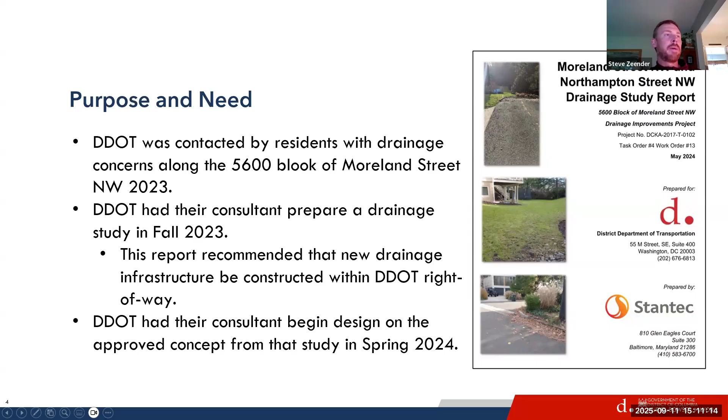Anything, Dave or Susan, that you'd like to add to that? We should do a high level overview of drainage design for everyone, because I think there were some questions about things that we take for granted as designers.

So the inlets - if you think about the storm drain system, rain falls on the surface, and because you have impervious surfaces like roadways or roofs, it can't infiltrate into the ground anymore, which generates runoff. That runoff is getting to Northampton. So as designers, we look at the drainage areas, we look at the engineering manual and design guidelines for DDOT, and then we design the inlets to those standards to pick up the runoff being generated, picking up 100% of runoff before it crosses that intersection.

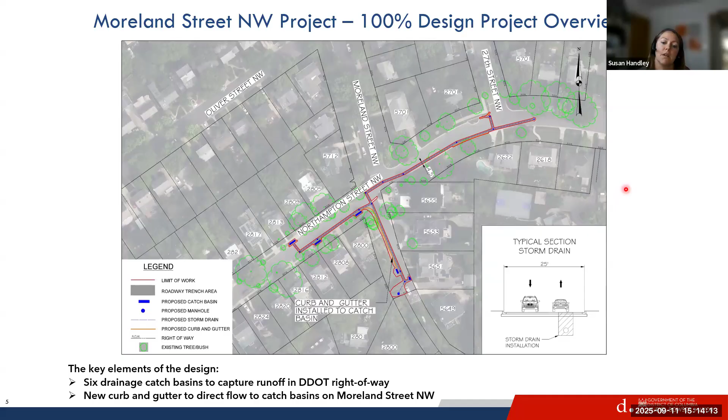Okay, I'll go to the next slide. So we've planned for the project to be constructed in phases, working from the lower point on the east end and then working our way up. We do anticipate for the majority of the project to be able to keep the road open, at least half of the road open, and use a flagging operation to control traffic back and forth.

We've made some initial assumptions on what the durations and phasing look like. When the contractors begin their work, they're also requested by DDOT to submit a schedule. But DDOT normally establishes an overall anticipated duration for the project that they want the contractor to perform within, so we do have some control over the overall time it would take to build this.

I think there might have been a question about work hours. The standard work hours are 7 a.m. to 7 p.m., not including weekends or holidays. The contractor would have to request approval from DDOT to work outside those times. Monday through Friday, 7 a.m. to 7 p.m. would be the typical time frame, though I doubt they'd work till 7 p.m. - more likely 7 a.m. to 3 p.m.

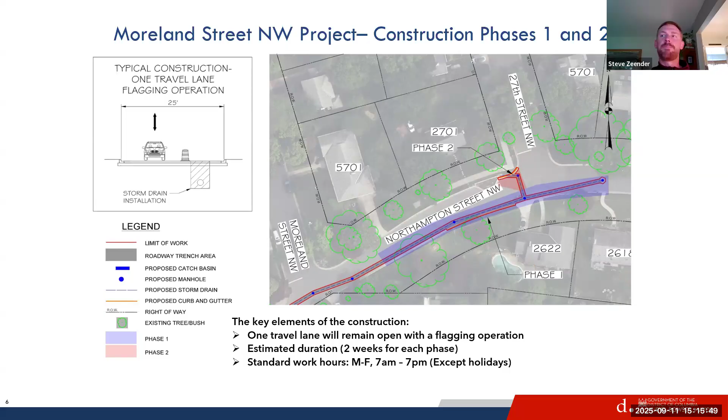Hey Steve, can I interrupt on that point? Typically, especially during winter months when it gets dark at 5 o'clock, you're probably not going to be working until 7 o'clock, right? That's right. And the contractor doesn't want to be working when people are coming home from work and there's a lot of traffic, so they'll try to get in and get out on a daily basis.

Going into the project phases, for most of it we anticipate being able to work along Northampton with flagging. However, this portion in the middle of the intersection, we feel will need to be closed while they're building these trenches, with a short-term detour around the area. But we think this work should be relatively brief in the overall scope of the project. This is phase 3B, Dave, and we haven't put an exact time to it, but we're probably talking a week, maybe two weeks.

Steve, we want to reiterate that the closure is only going to be during daytime work hours. During non-working hours, that closure will be plated - steel plates placed on the ground - and it will be fully open to vehicular traffic. The contractor would make it safe before the end of the day.

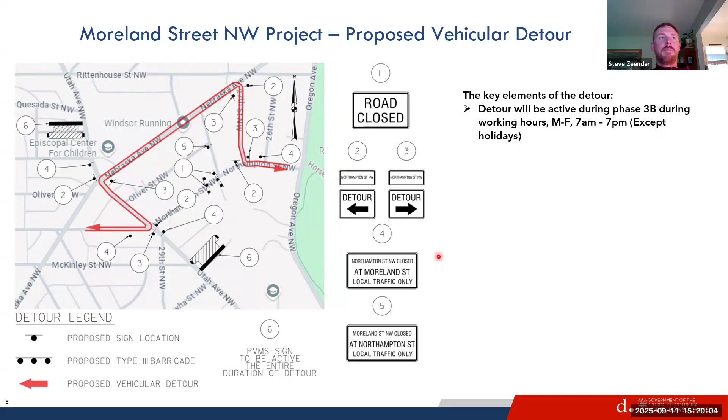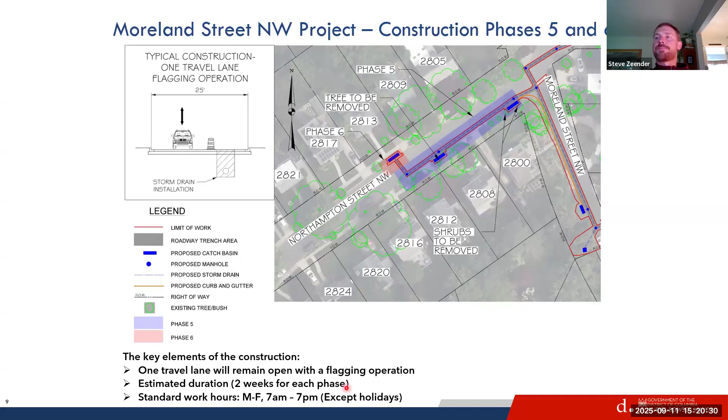So let's see, we're pretty much here, I guess, between 90%, really at 100%.

I'm not sure, are there any updates on the construction timeframe, Morvard? Is fall 2026 accurate? Yes, I am going to add this project to the next IDIQ construction. We are closing out our current existing IDIQ contract, so I put this for the next year.

Okay, so I want to be clear about that for everybody on the call, because I've been reporting based on the prior information that it might start as soon as this fall. This is actually moving it a full year, just to be clear here, right? It just happened, yeah, it just happened like last week as we are wrapping up our final task orders for construction. It's new news.

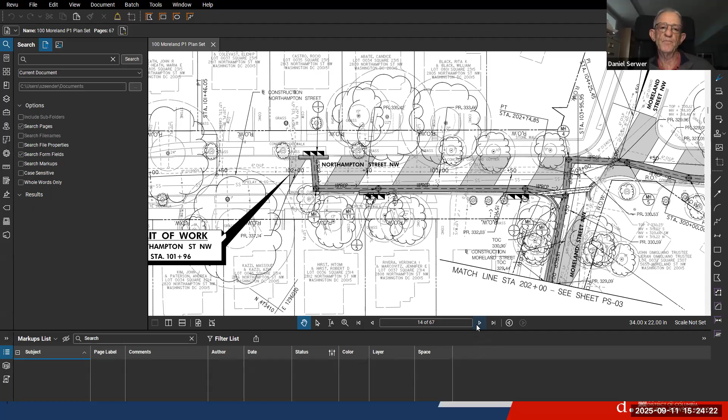Can you please zoom in, Steve? So if we do the construction, the pipe is right in the road, right? Is it in the parking lane or in the road, the travel lane? It's in the roadway, and then behind that is the sidewalk, right? And then behind the sidewalk is the front yard. We're not going to anyone's front yard for sure.

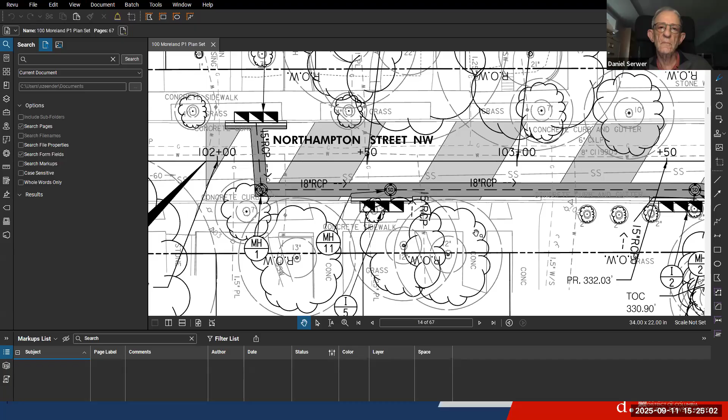The construction is very far. We are not disturbing anyone's front yard. We may have some maintenance of traffic for pedestrians, like we may close the sidewalk during construction, which I don't have any information on right now. We may detour the pedestrians somehow, but we don't use people's front yards for storing materials or disturbing it in any way.

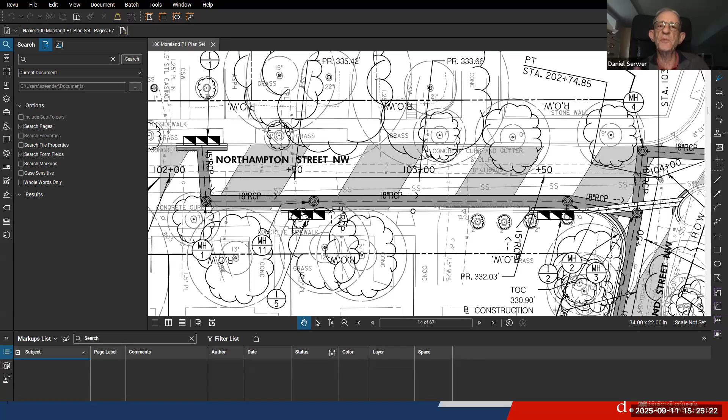Do you use the verge or the sidewalk, the verge being the green space between the sidewalk and the roadway? Unless there's an inlet placed there, no, we're not gonna do that. If anything happens, there are trees, we're not gonna touch any green spaces. If during construction something happened, we're also required to refresh the grass area, but based on the plans I see, everything is in the roadway. If we need to excavate nearby, we're not going to disturb anything in the front yard or even the grass area, or if we do, we put it back to the existing condition.

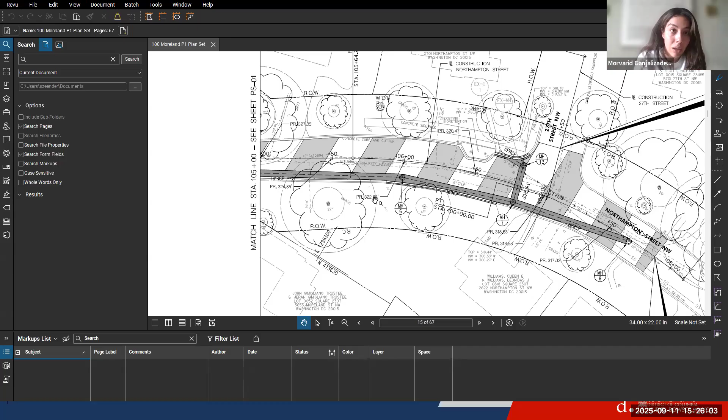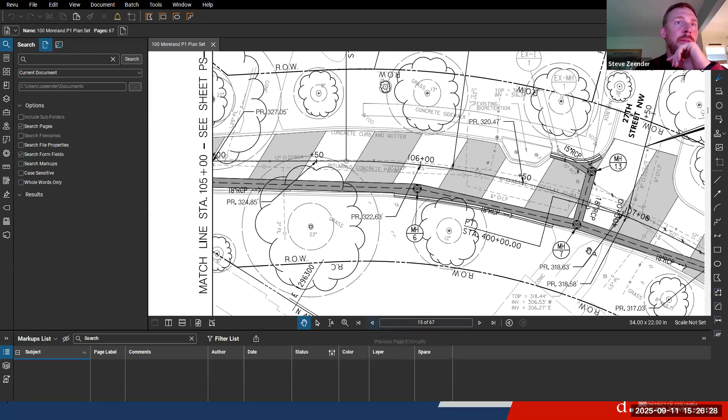I have one other question. Can I just elaborate on that? I just want to clarify. There are some places where our pipe trench gets close to the edge of road, so we would be rebuilding the curb and gutter in this location, and there's going to be a little bit of disturbance along the grass to rebuild that. Then to excavate for some of these inlets, there's also going to be some disturbance and removal of a few shrubs that are in the right of way. The right of way line is, you can see, back here.

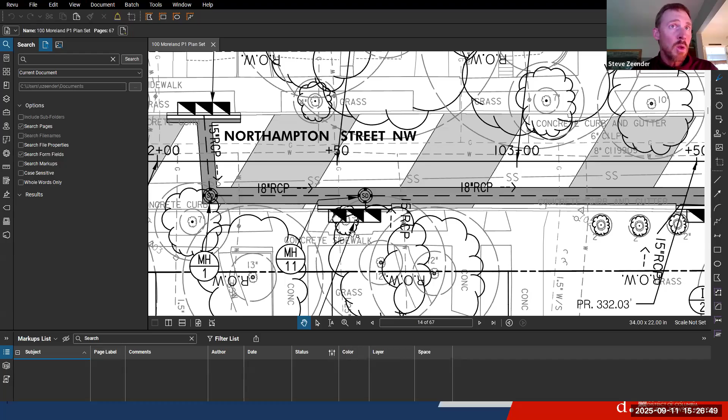I know from the standpoint of this invisible line, the concrete sidewalk and the grass all feel like part of the lawn in the front yard. We'll certainly try to minimize disruption to the verge, the grass buffer between the sidewalk and the curb. I looked it up online and that's the most commonly used term.

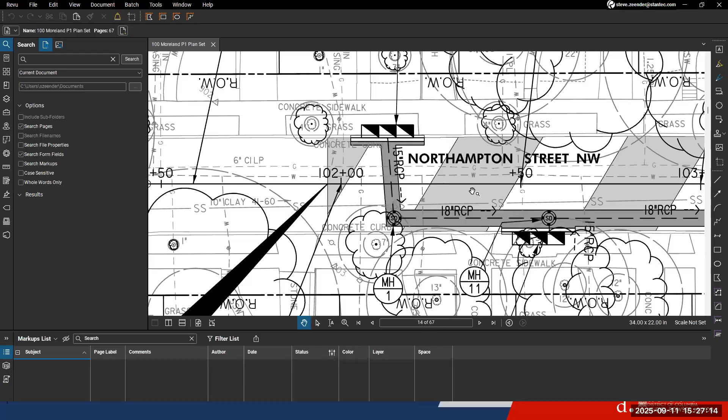Thanks for sharing that. Steve, can you open the LOD? That is the area of disturbance. We don't have any tree removal, right, Steve?

There's some shrub impact, and one tree gets impacted for the inlet removal, but that's just for this, not for excavation. You're going to remove it to have the catch basin, right? Correct. But all equipment and material will be stored in the roadway.

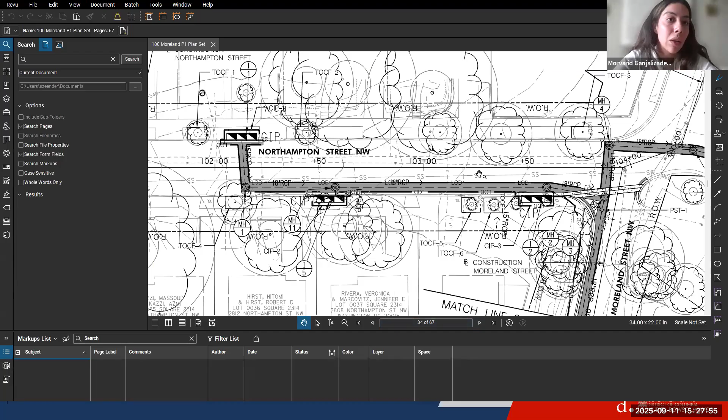In the road, normally that's how we do it. Case by case it's different, but nothing will come to the front yard. It would be in the roadway or parking lane where cars are parked. So this is our area of disturbance, this line here. LOD stands for limit of disturbance, what the contractor is held to during construction.

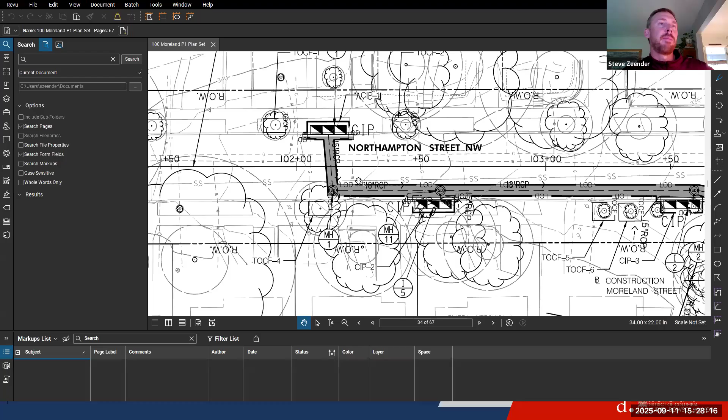So there's really no reason for them to go beyond that other than to put these inlets in. They're going to have tree protection fencing around the trees that don't get impacted. And where they have curb and gutter that has to be replaced, there will be a little excavation behind the curb and gutter to install that.

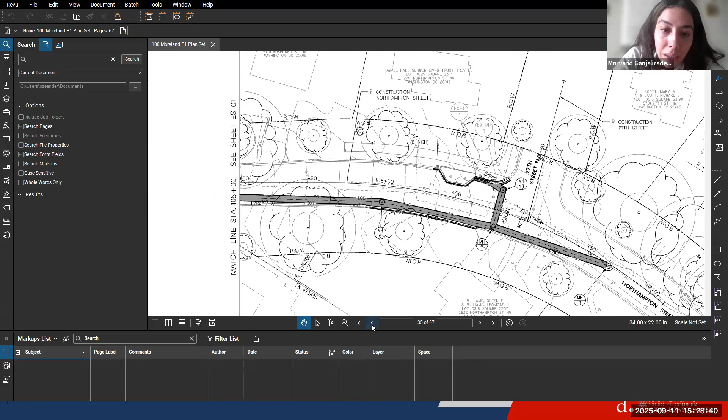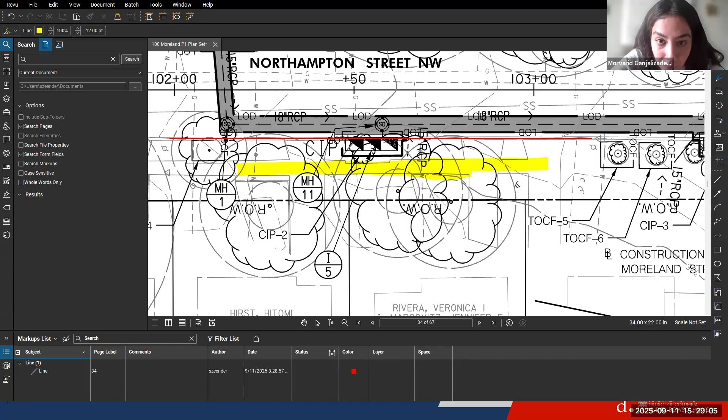Can you also go back to the previous page and show where exactly their front yard is and how far we are? If you zoom in, can you point out the front yard of the house and then where the limit of disturbance is so we understand? In this case, the curb and gutter is right here, and the sidewalk is here. This is the right of way line. So there's a little grass up here, but the limit of disturbance is well within it.

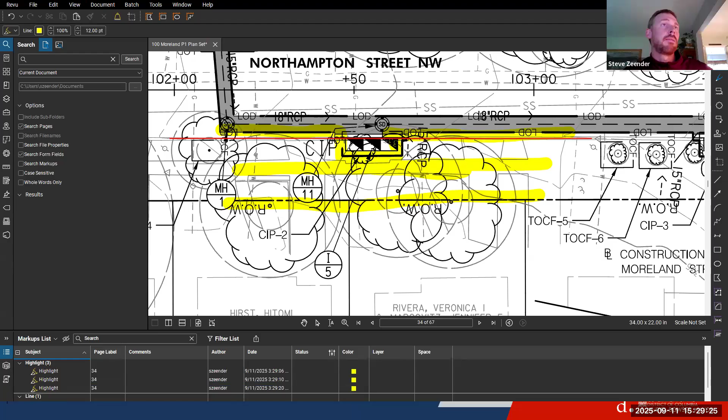You're going to disturb the verge in order to install the grates, the inlets. Correct. It'll be restored once the inlet's installed, it'll be restored with grass.

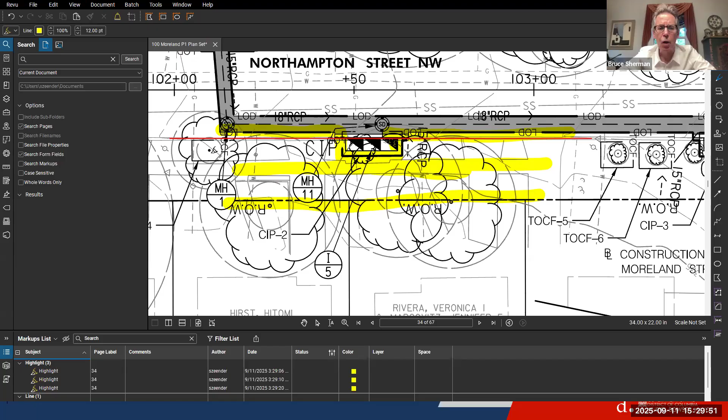Hey, Steve, it's Bruce. Just a quick question. Carolyn Copper, who lives at the corner of Moreland and Northampton, and her next door neighbor Jen Marcovitz, they're on the call, and they had questions once upon a time. Carolyn and Jen, I don't mean to speak for either of you, but I want to clarify here, removal of shrubs or trees to put the inlets in is something we can just reiterate.

Steve, if you zoom out slightly with the plan, where Moreland is, which presumably is on the right of the screen as I'm looking at it, right? Correct. Okay, so right at the corner is Carolyn's house. Carolyn, if you want to jump in and ask any question about this, and Jen, if you do too, I know these questions have come up before. It's a great opportunity now to clarify exactly what's going to happen here.

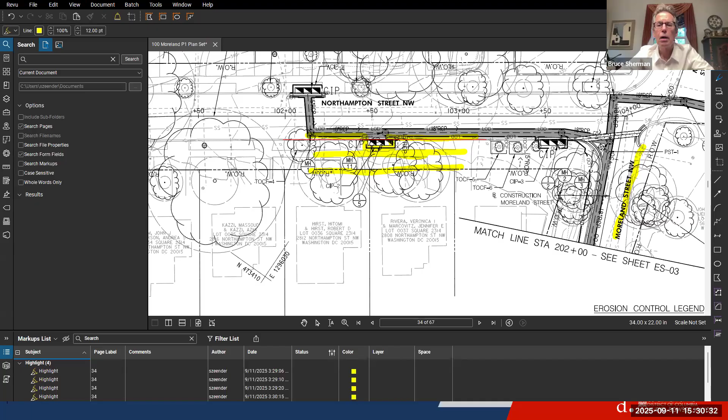Steve, maybe you can just describe it, because with a lot of the design or the lines on the plan, it's sometimes hard to see exactly what the removal of a shrub or a tree is going to be. Just point out where the drainage inlet is, I guess, right?

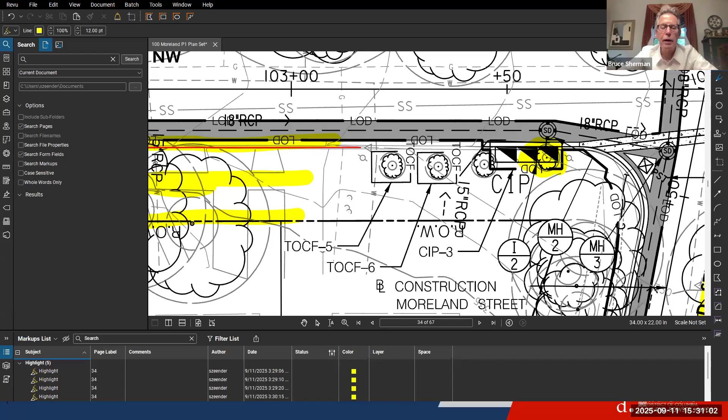So I think there's a crepe myrtle right here that's in conflict with this inlet, and that one to the left, that's going to have to be removed too, those two. And then there's one actual tree to the left, I think that's at I-5. There's this tree and it's small, I think it's like 2 or 3 inches in diameter.

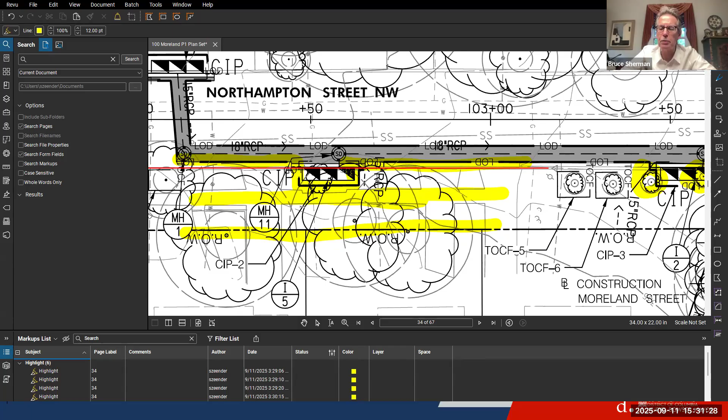Now, when you put the inlets in and you've taken the trees out, does DDOT, and this is a contractor DDOT question as opposed to a Stantec question, come in and replant? Or does urban forestry come in and replant, or what happens? I don't think we're proposing a new tree. In this case, there's just nowhere to put one because of other utility conflicts or underground utilities.

I suppose I can help a little bit.

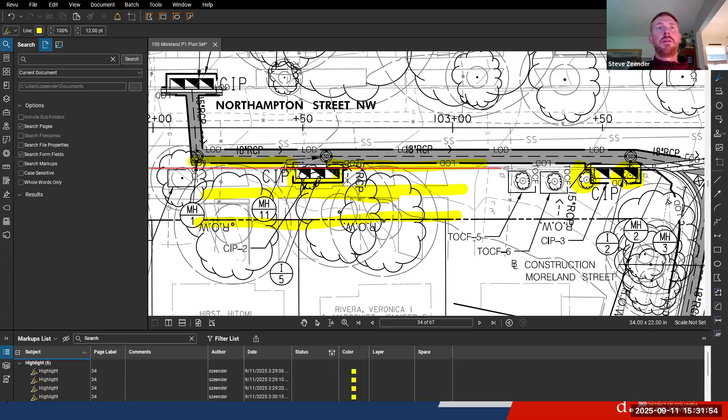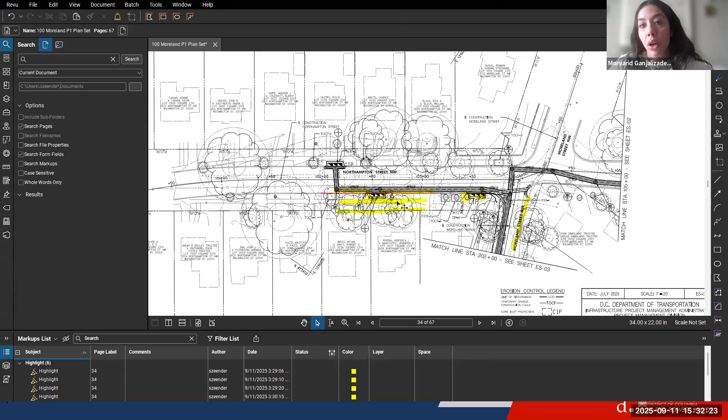Normally UFD reviews all of our plans, and we are not allowed to remove any trees unless we get approval from them. Then they decide based on the plans if we need to replant a new tree or if it's feasible. For other projects, if it's a mature tree, we try to avoid impacting any trees as much as possible.

This is a small tree, it's a small shrub. I don't know what the reasoning was behind it. I wasn't involved, I don't know, Rashid knows, but they normally approve and decide whether replanting is needed or not.

I assume this is all shrubs or small trees, so that could be a reason, or the underground utilities. We can dig and see what the reason was.

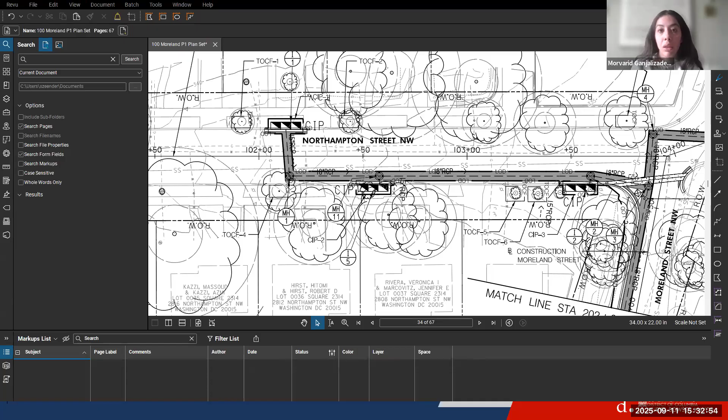Okay, all right. Again, not to put either Jen or Carolyn on the spot here, but Bruce, both of you - yeah, go ahead. I just couldn't figure out how to raise my hand. Apologies that I'm on a phone, but thanks very much for asking.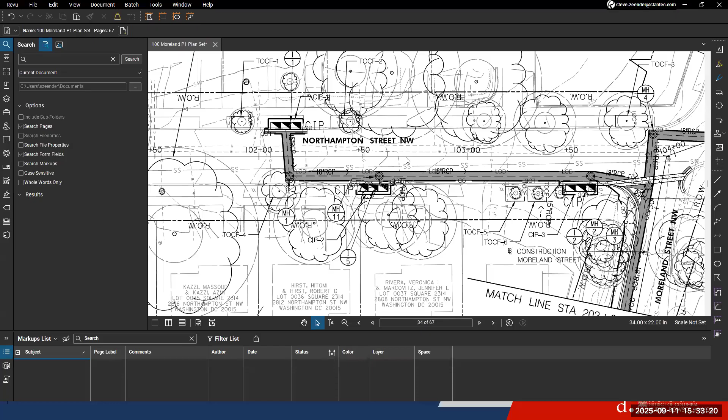I'm happy to defer to Carolyn or others who have questions. I just wanted to confirm which tree was being referred to in front of 2808 Northampton. It's a little difficult for me to see the slides since I'm on my phone. I think you're referring to the small tree in the inlet between the sidewalk and the street, in which case I believe the city planted that tree. I just wanted to confirm that's the case, if someone could let me know without pointing to the slide.

Thank you. Yes, that's the tree being removed, the one between the sidewalk and the street. Thanks, no other questions from me. So is this a current enough Google picture to capture that tree?

I don't think so, I think this is 2019. I think the tree is... okay, so it's an older image. Anyway, it's on the easement, right on the side. It's a tree, okay, all right.

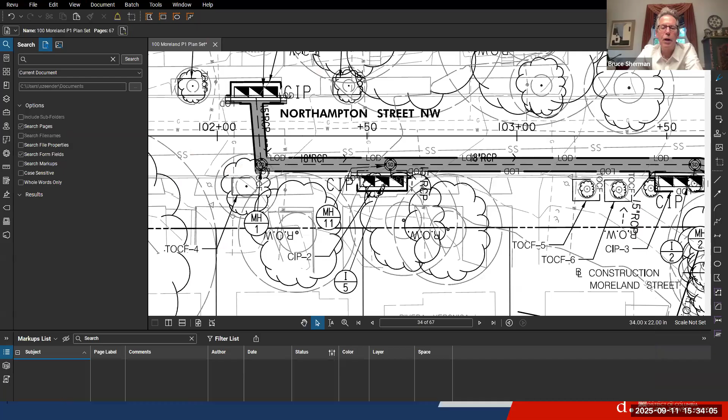Well Jen, obviously you know which tree it is. No, that answers my question, thanks. Okay, fantastic. I did have one other question, if you don't mind.

This is a pretty expensive project. Do you know how much it's going to cost? Oh, let's see, give me a second. It's around 1 million, I think. How much? Yeah, it's 1 million, 1.2.

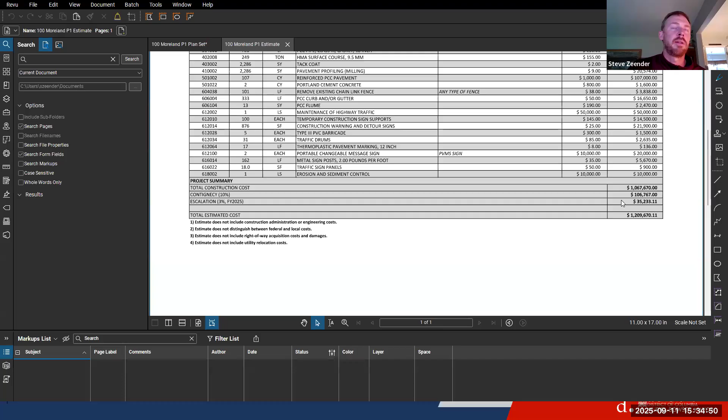The question I have is whether you considered any cheaper alternatives. Well, there's unfortunately not a lot of alternatives to begin with.

We did look at this area. There have been some things done previously, on a small scale, some small stormwater BMPs that were put in on the property at the end of the street, but they really aren't sized or capable of handling the amount of runoff that comes down in the larger storms.

Really the only alternative to stay within DDOT's right of way is pretty much what you're seeing, to intercept that runoff and take it back and tie it into the nearest storm drain system. There's just unfortunately not an existing storm drain system in the vicinity, so we're having to build several hundred feet of new pipe and inlets to bring this street up to DDOT standard, which is to handle the 15-year storm.

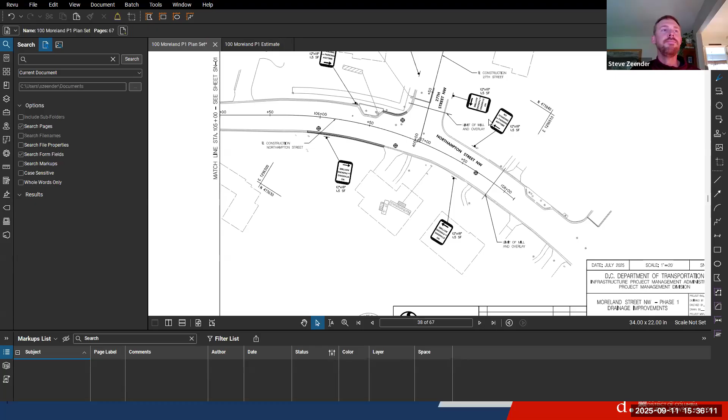So does that answer your question? I think it does - you didn't consider cheaper alternatives. I can cite a few of them, but I don't want to get into a quarrel during the meeting. There are other options.

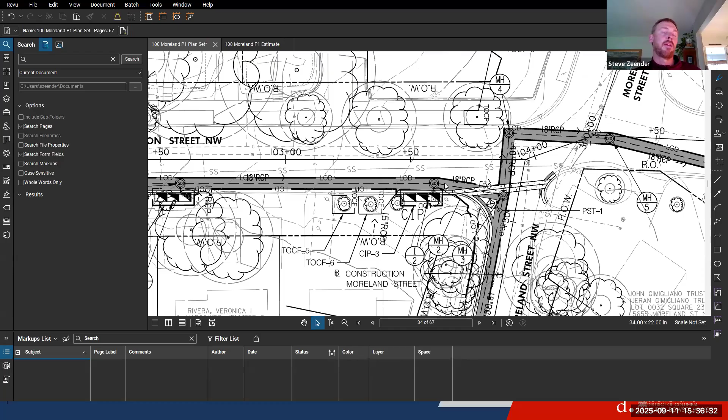There were improvements in the past to this gutter, to try to at least prevent some of the runoff. So that has been tried and could be considered. The real issue is that a lot of the runoff is coming from private property, some of it's coming from DDOT's right of way, and I'm trying to get back to a drainage area map to show what I mean.

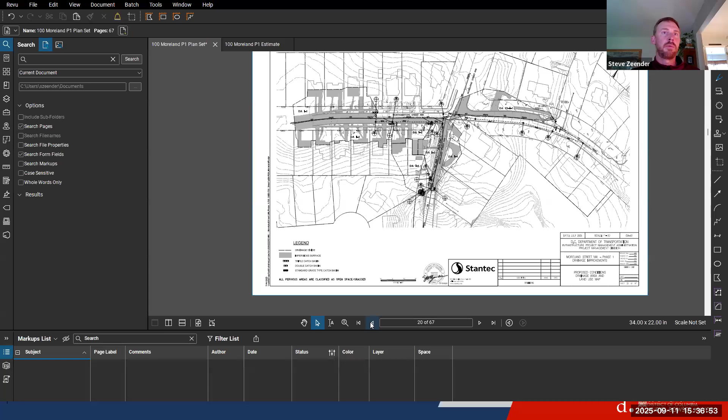I guess this is... yeah, while you look it up, I mean, really, this should have probably been built in the past, is the issue.

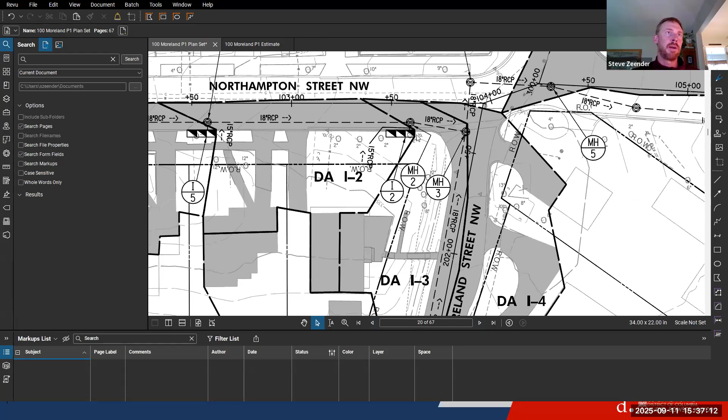So maybe you can see, to do this kind of gutter up here intercepts some of the runoff on Northampton, but there's a lot of runoff coming from these properties back here, just overland, that we're trying to intercept. Even with this project, we're not necessarily going to intercept all the runoff from private property, but we're going to intercept what comes into DDOT's right of way, whether it started in private property and then comes into DDOT's right of way, or runoff that was already in DDOT's right of way that wasn't being captured. So we're going to capture all that.

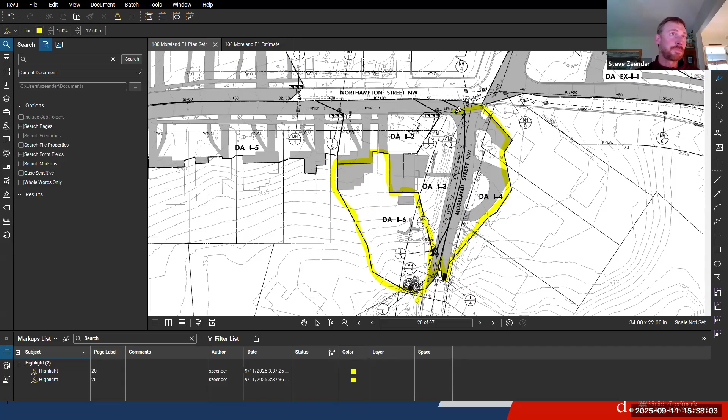I'm going to just try to highlight those areas so you can get a feel for it. All this now isn't really controlled, and just runs down into the backyards down here. So we're going to put in a couple different inlets.

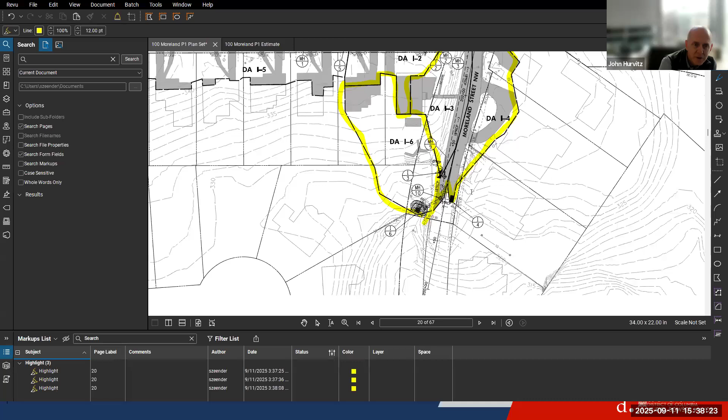Yep, all right, this is John Hurvitz. The other thing, you alluded to this, but just to point out, to the left of where you have the yellow, if you look at all those houses on the south, this isn't being addressed in any meaningful way. The gray is what's going into the street, the white is what's going behind the houses. So most of these houses on the south side of Northampton Street, the water they're collecting on their property is going into the backyard, which then makes its way into the houses down here on Moreland Street. That's what you guys explained to me earlier as well.

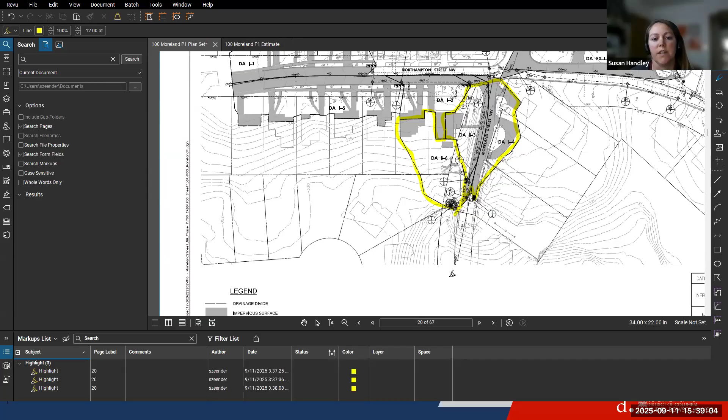Yep, so like Steve was saying, this will pick up the drainage, whether it's generated in the DDOT right of way or goes from private to DDOT and back. It's going to pick up that portion, which is about half of the flow that is actually getting to those yards. So this is only picking up the public, the DDOT right of way runoff.

Right, no, I'm not complaining about it, it's better than nothing. But my point is that, to the extent someone says, well, it's not my problem, why should I worry about it - well, all these houses on the street, their water, not that they're doing it because they're bad people or anything, but the water flow across the street is all coming from these houses to the left of that yellow line. If you could highlight that - the water flow is all coming down into the properties here too. So it's a problem of the commons.

You're making my argument for me. Well, I'm not - this project is only capturing 50% of the water coming away. We paid, and all these houses on Moreland Street, when they were constructed, we were required to manage our own stormwater. So we all have basins in our yards designed to manage our water. We're not required, and it's impossible for us to manage the water from the neighborhood. And yet that's what we're forced to manage, because the water flows in.

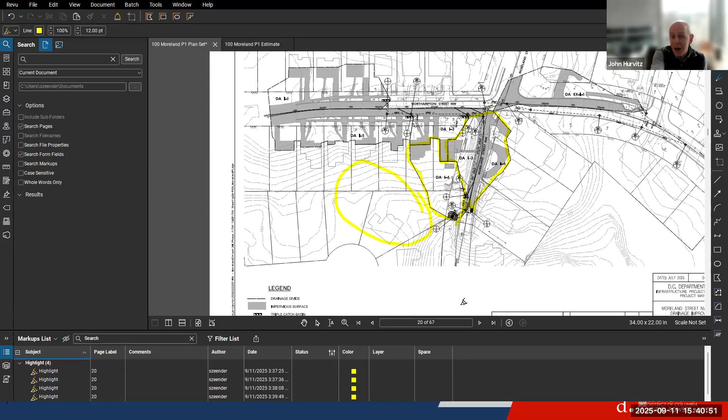When there's a storm, even a mild storm, I have 6 inches or more of standing water flowing through my yard. It goes over the retaining wall we have and onto Moreland Street. And the house behind us has it flowing through their whole basement and their entire house. There's nothing any of us can do about it because it's just unstoppable. So this project is collecting 50% of it so there's a hope of managing what's retained.

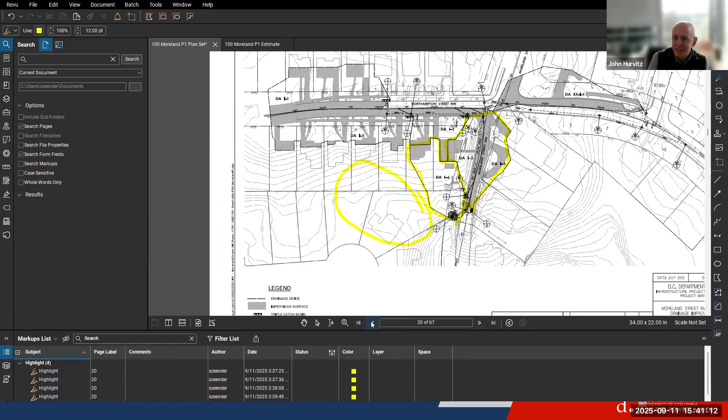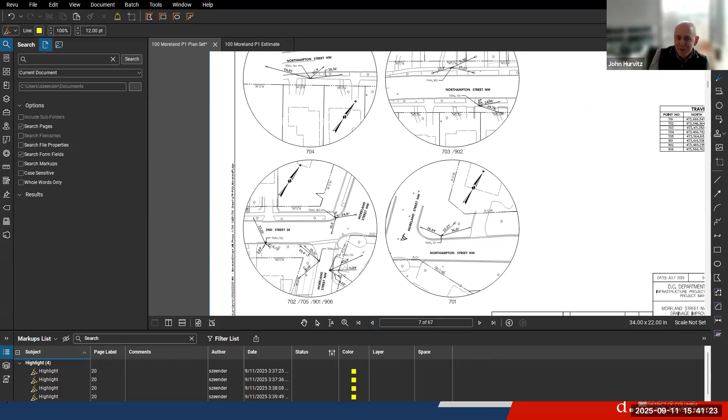But ideally, everyone on the street would divert their water to the front of the houses, which I think they're not even allowed to do by DC laws, as I understood. But this is not an inconvenience, this is a huge problem. The bottom of my house fills up with 6 inches of water, there's nothing I can do about that. And it doesn't even require a 15-year storm - it happens once, twice, sometimes 3 times a month.

And it's not just me, it's all the houses along our street and then all the houses along Moreland Place behind us, because the water, when it overwhelms our houses, it then floods everyone else's houses down the hill. And as the person on the phone said - I'm sorry, I can't remember your name - this should have been done, the street improvements are only to bring this up to code, and it all should have been done years ago. It's just never been attended to, and now it needs to be fixed, should have been done by the developer.

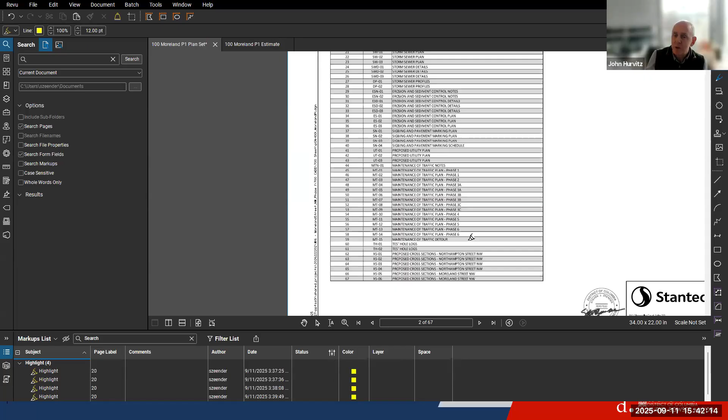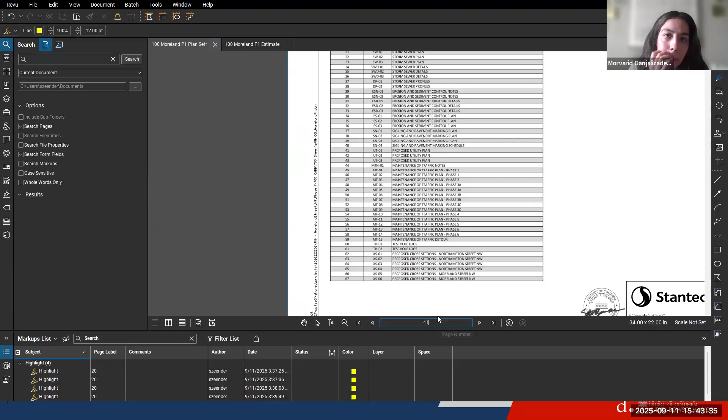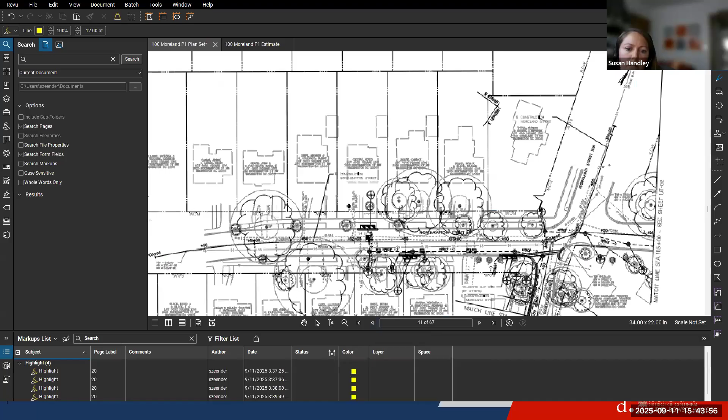Steve, do we have any? We're trying to finalize - the last time we spoke, we didn't anticipate having to relocate a lateral, but based on some DC Water comments, we do have one lateral that has to be adjusted. We also have the gas relocation. These plans are not the latest, but we had to make an adjustment to the location of this manhole and this connecting pipe, which is going to impact the lateral to 2808. So that water lateral will need to be relocated.

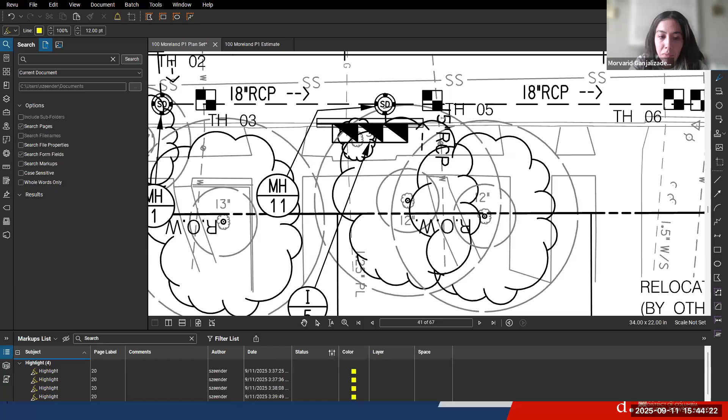Gas, 1 or 2 days for work - it would just take a day or two probably to do that work. What is a lateral? The lateral connects to 2808. It goes from the main water pipe, the 8-inch, to the house.

So during that time, that family won't have access to water? I don't know what the specific outage would be, but I would imagine it's a very short process - it's a DC Water relocation, right Steve? Correct. It depends, I think sometimes our contractors do it and DC Water pays us in most cases. So our contractors do it, it's a very quick process. It's not like a whole day or a couple days, it's gonna be a couple hours process. They normally do a lot of coordination in person with the residents to make sure they know, and it's not a very long process. I don't know if any of these streets have a lead pipe or anything like that with DC Water - it's not a very complicated case. It happens during construction, it's very quick.

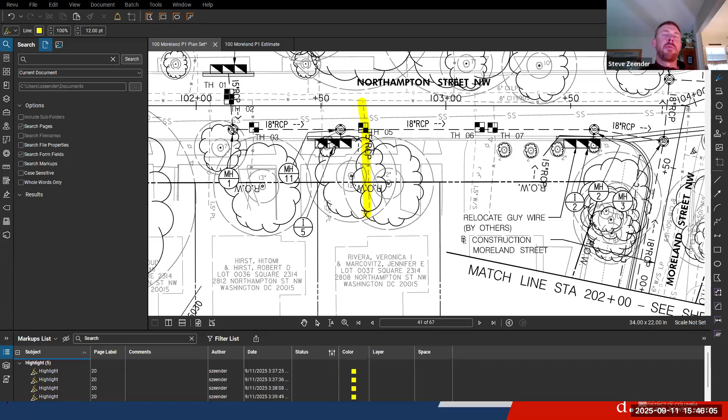Yeah, I'm gonna guess they would trench and install the new lateral, and then switch it over once it's ready to go. So the outage would just be the period of time when that switchover happens. But they do this type of work all the time, it should be pretty straightforward.

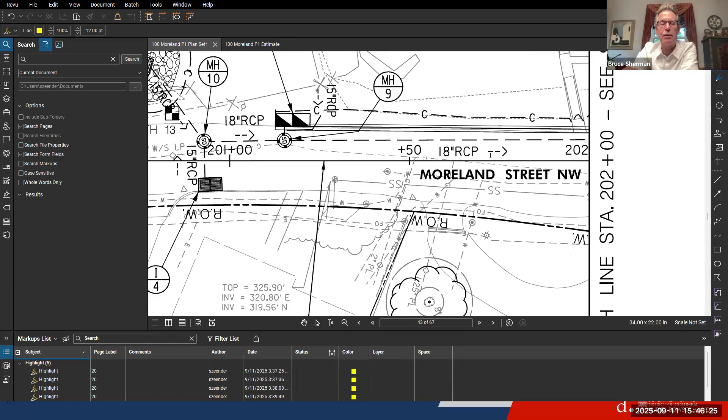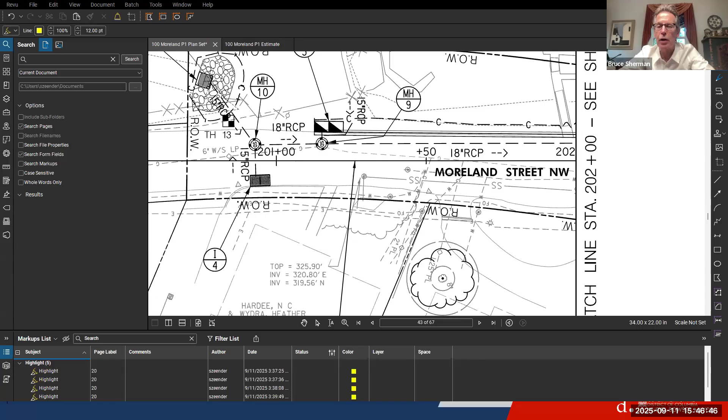One thing, can we do this though - can we get the actual schedule or details on this to answer this question for anyone else who has this concern in mind? I know we're talking about it right now and answering it, but it might be good to come back and say, these are the properties affected by the relocations and about how long it's going to take. And since construction is not going to take place until 2026, a year from now, these relocations are not going to happen until shortly before construction begins - is that correct?

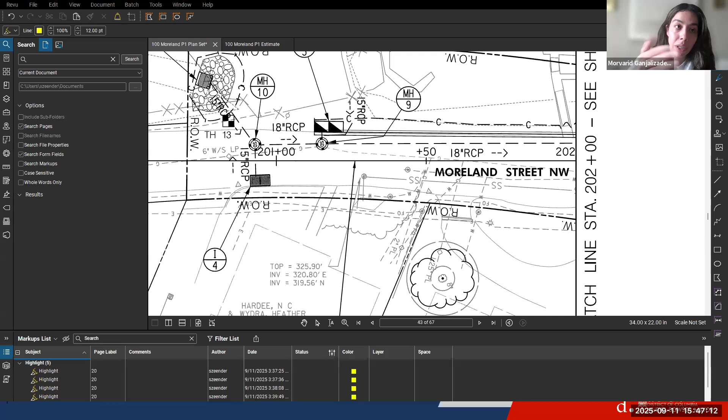I can't speak to the exact schedule. This is during construction. Normally when we start construction, relocation happens - it's the same for all our projects. It's during we start and then we do it. There are some cases, probably for Washington Gas, that could be different - they do their relocation a week or two weeks before we go ahead. But we're talking about 2026 in any case, yes.

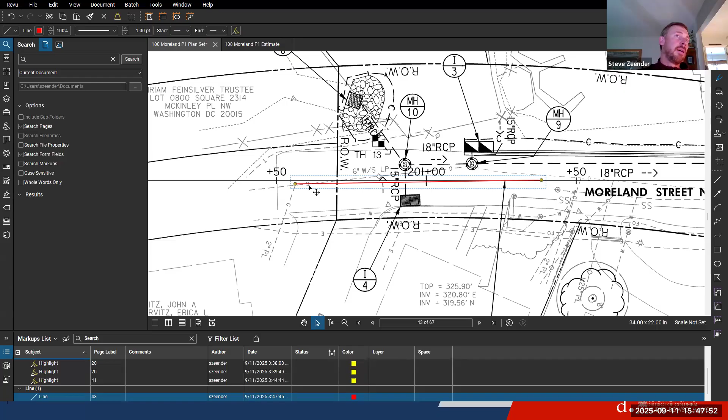And the gas lateral gets relocated here. This is on the south end of Moreland Street. It's in conflict with the storm drain manhole. It has kind of a weird circuitous route, so we're going to straighten that out, and that would also happen. I think it's a 6-inch line. So that would happen around the same time.

Okay, just going down the list of questions, and Carolyn, if we didn't answer that sufficiently, let us know. But to Rita's question, how will trash be collected during the time period the road is completely closed? And will lawn companies and deliveries be able to use the roads? Is this a road closure for Moreland? For Northampton too, presumably - Rita lives on Northampton. During the presentation, someone said there was a section of road that will be closed completely for a short period of time, maybe a week or two.

For trash, I can speak to that - our contractors during construction will take care of it. When we come and notify you about the construction, there is guidance on how we collect trash. Case by case is different, but normally when we leave fact sheets, we guide you on how we're going to collect the trash. You can put it outside, they come grab it and then put it back. It's our responsibility to do it.

In terms of deliveries, that's something that needs more coordination during construction. Per my personal experience, normally if it's closed, we still maintain a walking path, so they park the car and then walk and do the deliveries. It's going to be an inconvenience, I understand, but for trash, I'm pretty sure we are responsible for it - our contractors will do it.

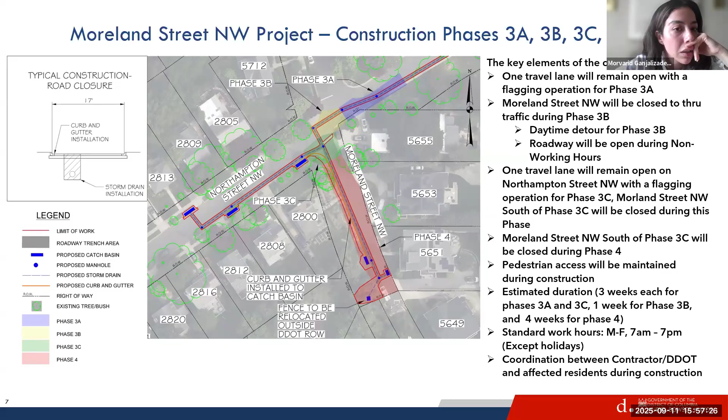Will we have access to our driveways? I know we've talked about not being able to park on the street, but will we be able to get into our driveways during this time? Your driveway is in the front - yes. Well, the ones that are impacted, there's no parking, and I need to see where the driveways are. Steve, can you show me them? We wouldn't actively block egress and ingress to homes, right? I don't think that's a standard we follow.

Unless construction is directly in front of your driveway for trenching the pipe, that's why I wanted more clarity - access to a driveway will be maintained. There may be some coordination with the contractor in terms of if your driveway's in the flagging area, when you can leave, but your driveway will not be closed. The only time we have a driveway closed is in the alley - sometimes homes in the back have a driveway in the alley, and the alley is closed. Like if we close the Moreland, and your driveway is in the Moreland, we can't do anything about it.

But if it's in Northampton, I think it should be fine. And Candace, your house is clear of the trenching. They're not going to be trenching on that end of Northampton.

Oh, okay, thank you. Actually, kind of a follow-up to what I was going to ask also. I'm just not familiar with a lot of these terms, and I'm not used to looking at drawings like this. Do you have any kind of an actual visualization when all is said and done? What will we see? What will it look like?

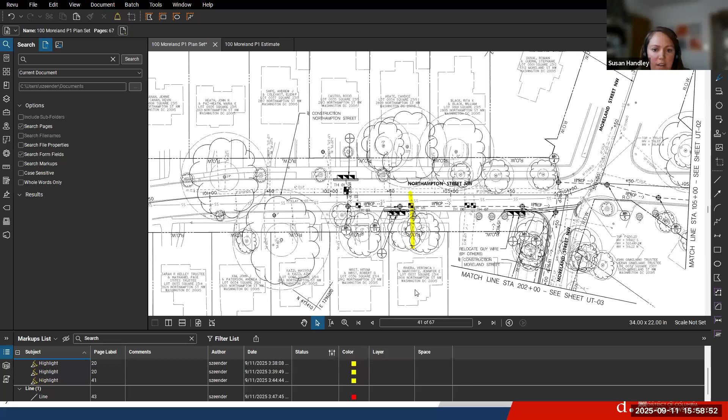I have a little picture so I could try and show it to you, but I don't have access to post it in there. So I can try sharing my screen. Let me see if that's the right screen. I normally don't show plans, I normally ask for rendered plans, which we did last time.

Yes, absolutely. Yeah, it's actually quite comforting. Thank you. Okay, good. I was like, I don't know if this is what she wants, but I'll try.

I will say, Candace, too, just to add on to that, most stormwater work across the city with what we do is all subsurface. So the piping you won't see, it will be all underground. The road will look the same outside of the bump outs and the additional catch basins that will probably be installed. Everything else on the roadway will be pretty much underground.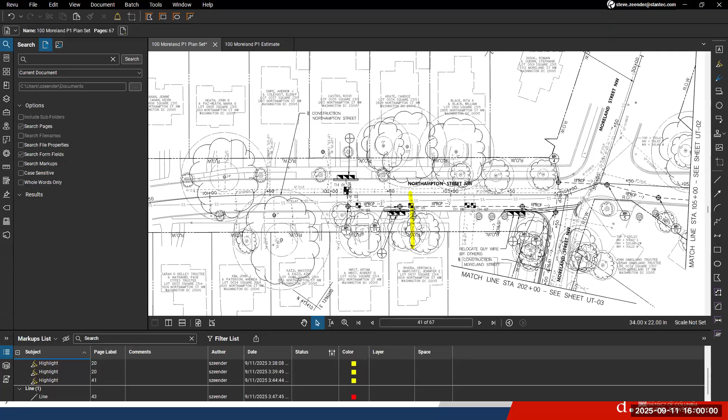Now, what is the catch basin? I know there's been reference to that. I'm not sure what that is. Wait, I'll share again, hold on.

Unless you have one, I'll just go down the street here and find one. Okay, I went down a little. There's one. So essentially, like this opening that you see, it'll go from curb, to opening, to curb again. That's just how the water is going to flow along, down the hill, down whatever the slope is. This is where the water is getting picked up, and then in this portion, that's where the pipe is coming in.

So the pipe is going to go from there, because pipes are straight, right? We have a manhole, so whenever we need to turn or have a bend, for certain things, it'll connect to a manhole. So the top just looks like a lid, and down, it's probably like a 4-foot wide circle or something that they can climb in and out of. The pipe connects to another manhole and continues on.

So the inlet is just the way that water is getting into the pipe system to keep it moving. Otherwise, you would have increasing amounts of volume in the curb spilling into the road, taking up the whole road, and having to flow down the whole thing. So the inlets are put along there to get the water into the system and move it along, not on the surface. Thank you, that was really helpful for me.